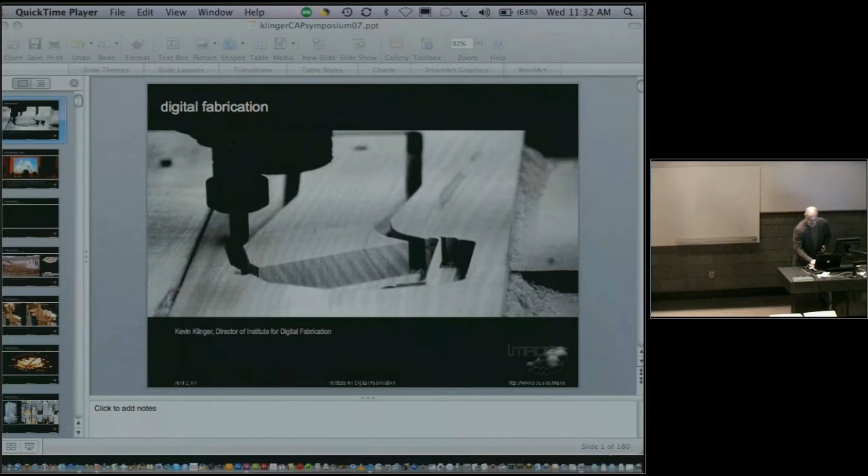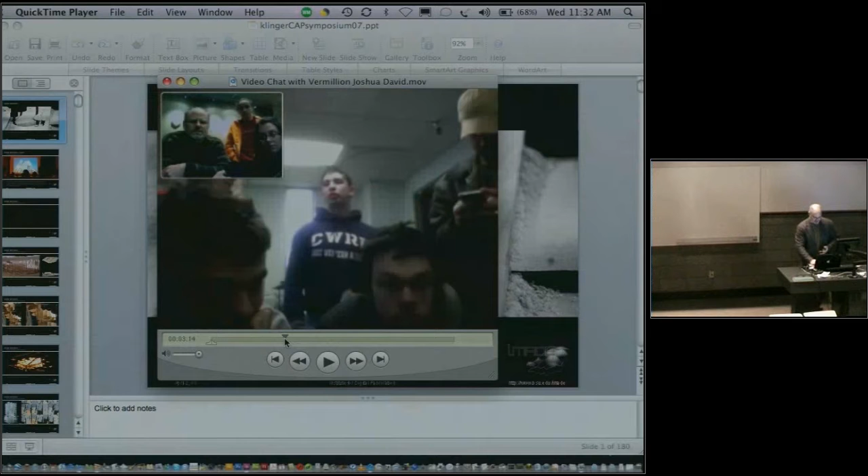Let me just move ahead a little bit. We're up in Eaton, Indiana right now, this is 10 miles north of here. We had our router that we purchased, that is actually going to be here for the use of people at CAP, installed up in Eaton, Indiana temporarily just so we could get operational and working with it. I'm going to show you a little bit of it.

Nice shirt you have there. Hey Rob, hey Rob. So that's the router. Actually, that's the mold.

It's crazy, this project is absolutely about this kind of multiple tasking. But I digress. The factory up in Eaton, the students have been working up there to actually put the thing together. They've been working with a company called Arrowhead Plastics, helping them with mold making, working with plastics fabrication for the exhibition as well.

There's a responsibility to serve what's going on in our region, to connect with industry and people making things here in Indiana. Digital fabrication, as you saw in the presentation with the SOM work earlier, is something a lot of people around the world are really doing. We're trying to frame that notion and make the case that Indiana already has a strong tradition for making things. By connecting to these global networks, we can help Indiana industry enter into that conversation and make things better working with these kinds of devices and techniques.

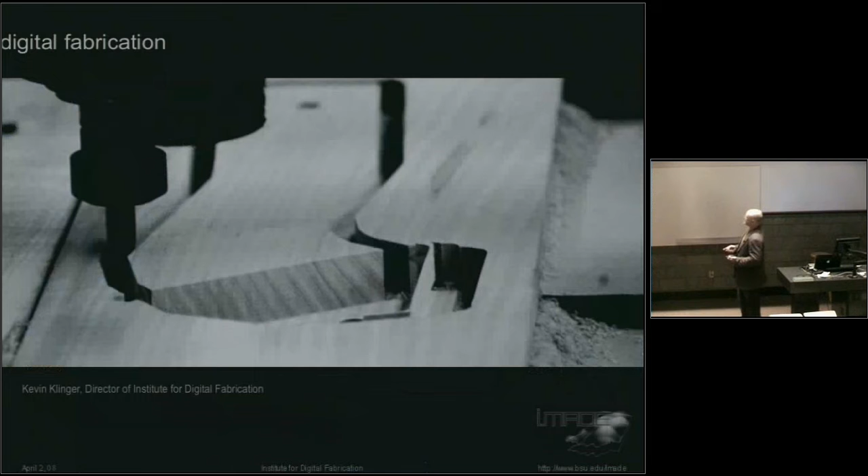To that end, we hosted a symposium at the Indianapolis Museum of Art called Manufacturing Material Effects, where we invited a team of international designers and thinkers from around the world, people from the offices of Rem Koolhaas, OMA, Shop Architects, Jeanne Gang. There were about 19 speakers gathered for the symposium. There's a book coming out - all the chapters have been edited over the past semester, and it will be out in June. The book is also called Manufacturing Material Effects.

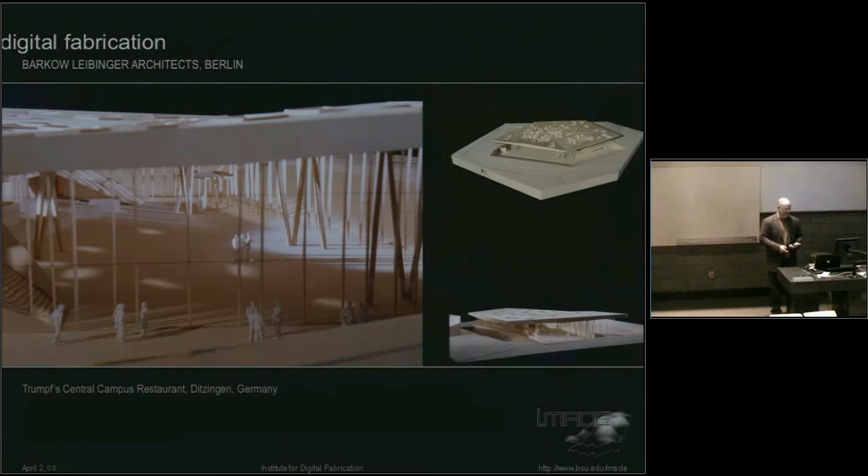I'm going to show you some of the work of the architects and fabricators present at that symposium. This is a firm called Barkow Leibinger in Berlin - they're looking for interns right now, by the way. The studio is working on this campus called Trumpf, a CNC machine tool company. They're digitally fabricating and customizing these daylight lighting systems for the cantina.

They've been working on office towers in Korea where they wanted to create a facade system - like in the 70s when everything got mirrored, the idea was a perfect mirrored facade, but it never quite worked because the mirrors were always slightly off, giving this kind of ripple. So they said, let's celebrate the ripple and make it consistently inconsistent.

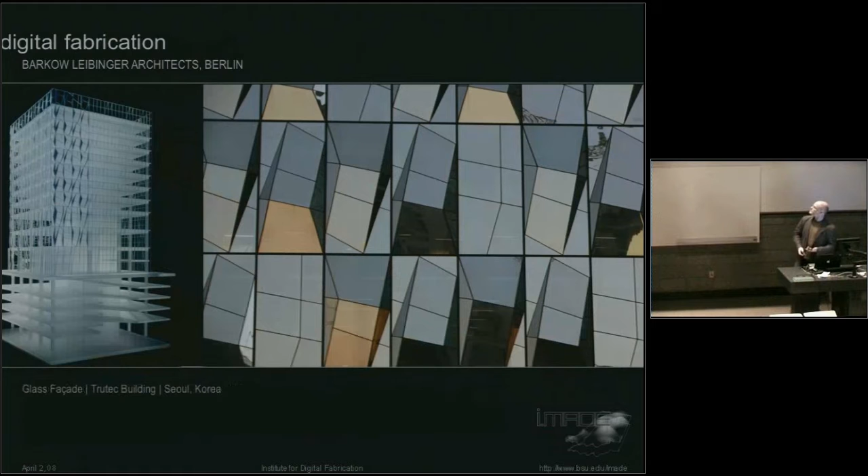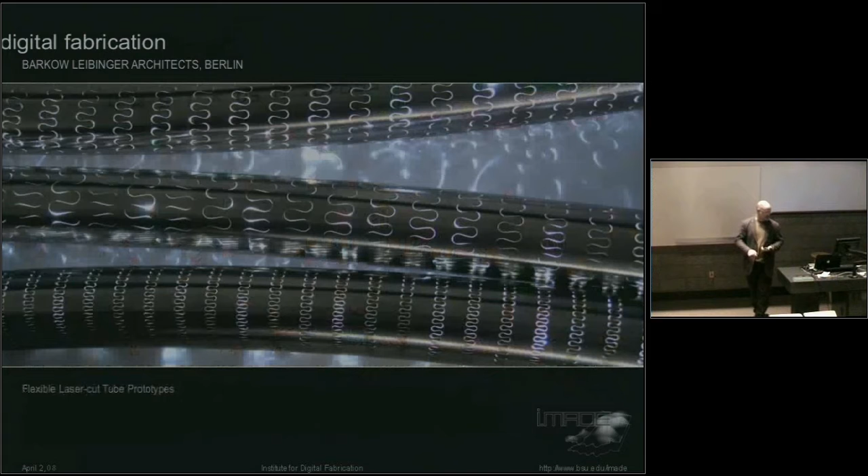This is the project under construction, and these are some studies in their courtyard in Berlin of this consistently inconsistent effect. They also have a machine tool that cuts tube steels, and they're developing lighting systems as well as an innovative facade system where these things can pivot on a point to control daylight based on where things are located inside the building. As the tubes spin, you can control the amount of daylight infiltration.

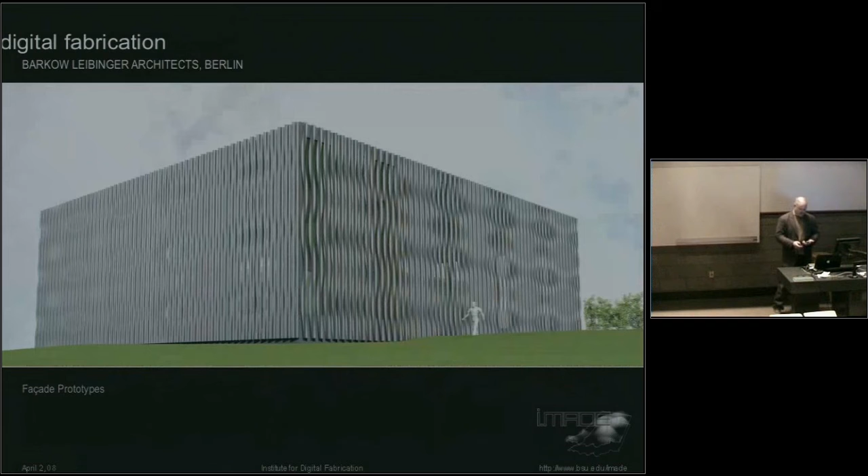They also have this great piece, the gatehouse to the Trumpf campus, where they wanted to achieve something like Prouvé's gas station, where everything was built as a fabricated piece. They wanted to play on that, but achieve an extreme cantilever. You know the rules of cantilever - you have to keep two-thirds of it back and cantilever maybe a third out beyond the boundary. But they wanted to push that limit, and the way they did it was by looking at what was happening in the factory at the machine tool company, where they fabricated framing systems for panels, then interrogating what that might mean for architecture.

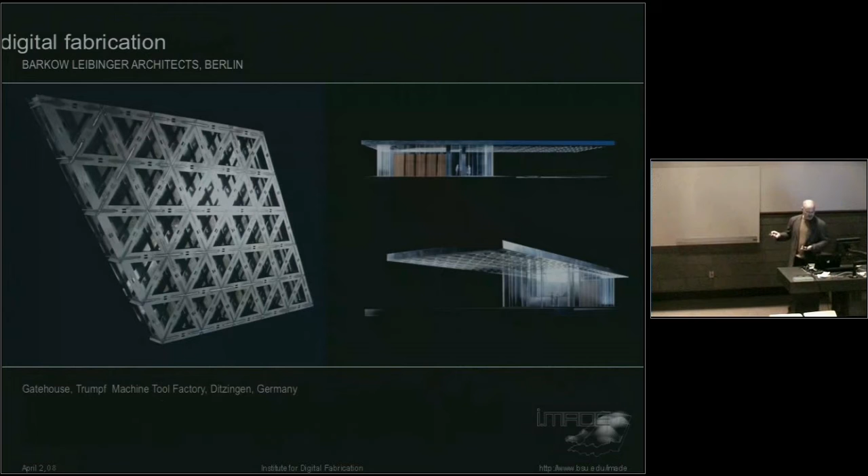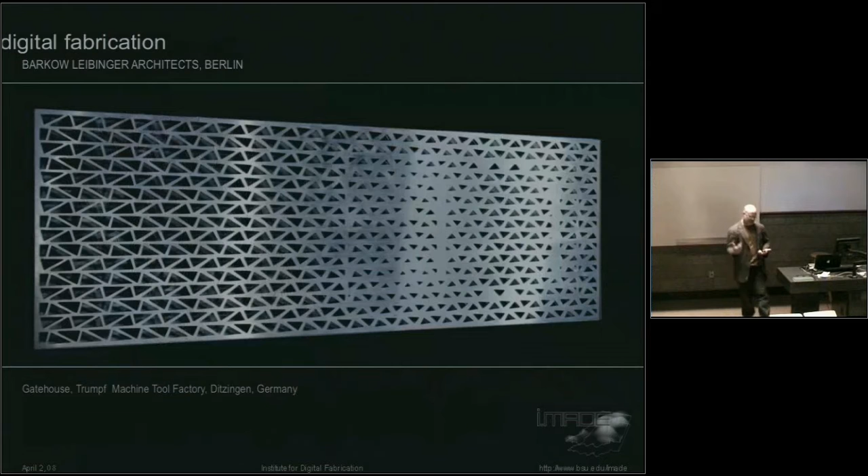They did stress analysis tests in conjunction with an engineer and developed a system where the form of the piece is informed by the way stress moves through it, so they can achieve much greater cantilevers. This brings the notion of study, simulation, and biological behavior directly into fabrication. You test it before you build it - you know exactly how it's going to perform, and you're able to achieve things you may not have achieved just by cutting it out of cardboard.

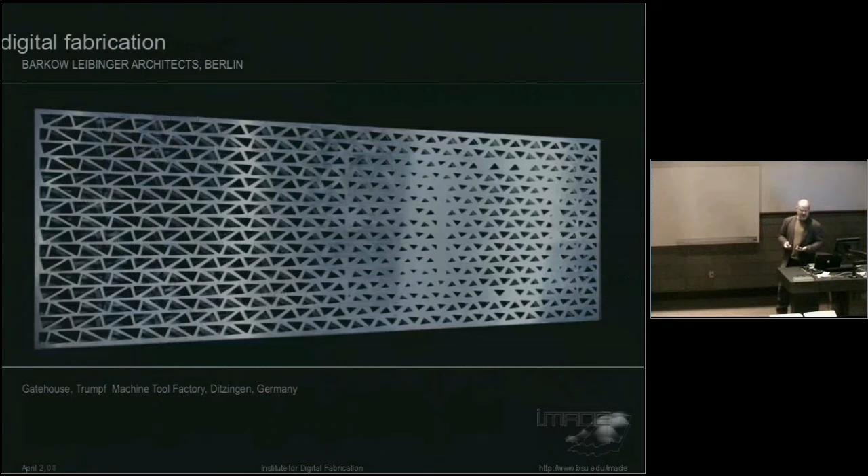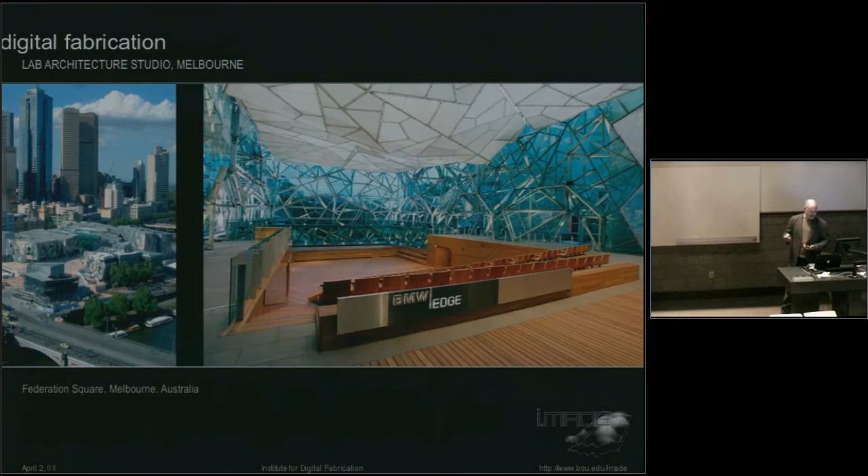So here are some other examples of firms that had work at the symposium - this one's a little more Baroque in nature. This is Federation Square in Melbourne, Australia, by Lab Architects. They were teaching at the AA, won this competition, then moved down and did Fed Square, and they've been in Australia ever since. They're doing a lot of work now in places like Dubai and elsewhere.

They wanted to study this kind of panelization and how they could achieve opacity, transparency, translucency, and openness in this kind of collage-type facade skinning system.

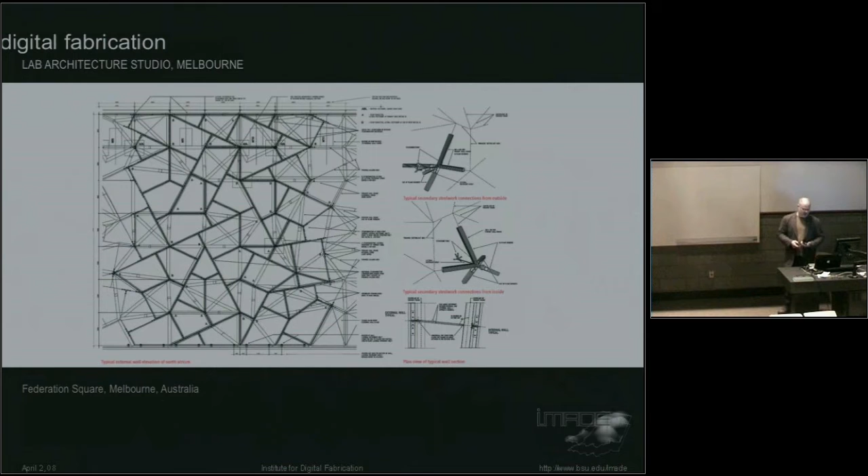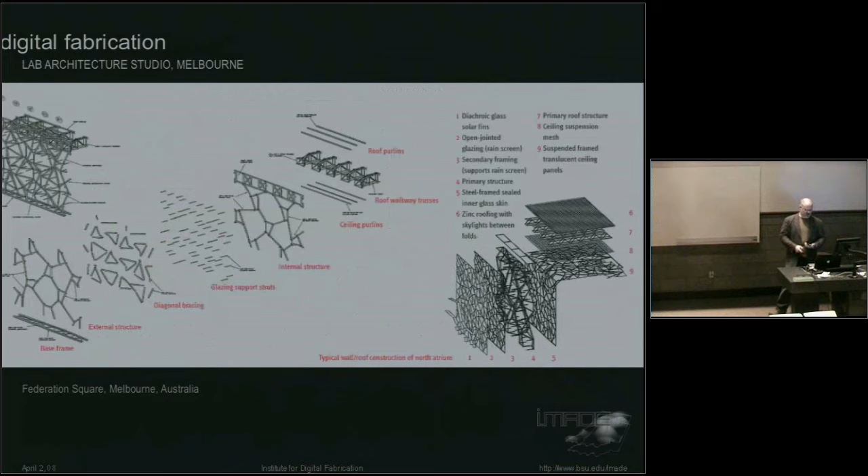These are the actual construction documents, taken directly from the model. The information is so complex that it takes algorithms to actually generate the form, but then they're able to take those algorithms and translate them directly into the model, which they can use to send directly to the fabricators and make every part, piece, and component. These are some of the actual documents used to get the thing built, coming directly from their model as well.

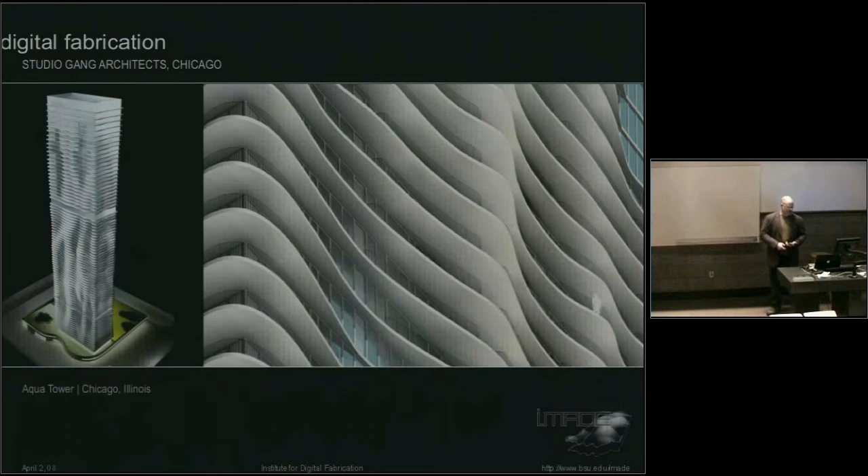Another one, a little more local, is Studio Gang up in Chicago. This one just started construction, called the Aqua Tower. Instead of thinking of a surface effect applied or wrapped around a building, they started to interrogate the floor slabs based on information about views, maximizing views along the lakefront. These are some renderings of the piece going up right now, and diagrams they used to develop and study the facade system.

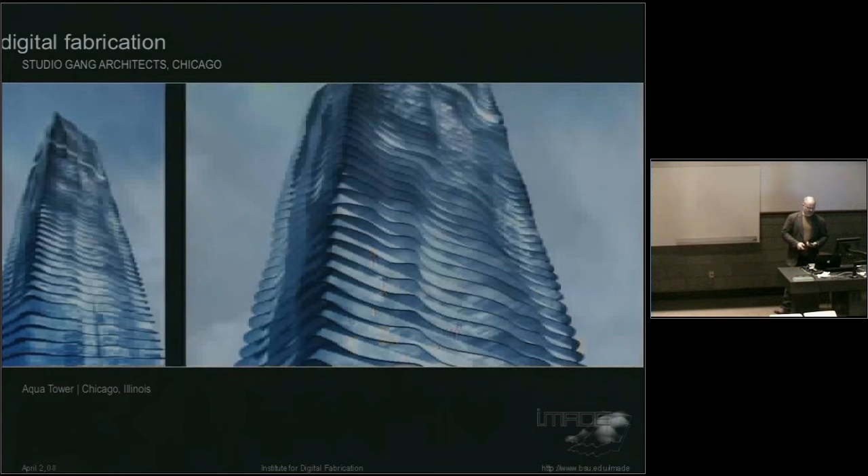I'm going to go through these quickly because I really want to get to the student work. If you want to see this stuff in more detail, please stop by the Indianapolis Museum of Art for the exhibition, because a lot of it is on display. There's a sensibility of materiality in a lot of these projects as well.

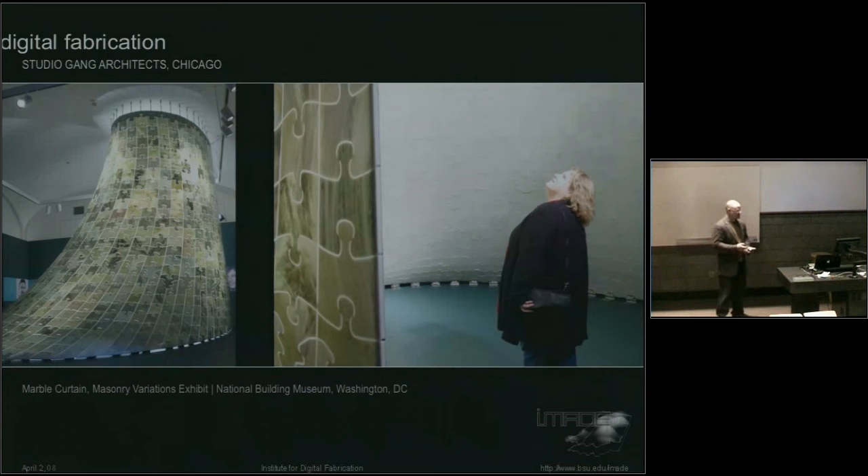Jeanne Gang also worked for the National Building Museum and developed this marble curtain, a kind of hanging curtain, where they worked with Thornton Tomasetti, structural engineers, to figure out a way to use stone in tension, since stone is always in compression. They wanted to see if they could innovate on stone, and developed a joint system, a kind of detailing where the whole thing is like a puzzle piece that translates loads all the way down to the ground, with the piece itself hanging from the ceiling. So it's actually stone acting as a curtain piece.

Some other projects they have going in Chicago. And then, of course, Architectural Association—you all know Jason Johnson. He went there and has a good knowledge of this kind of working methodology.

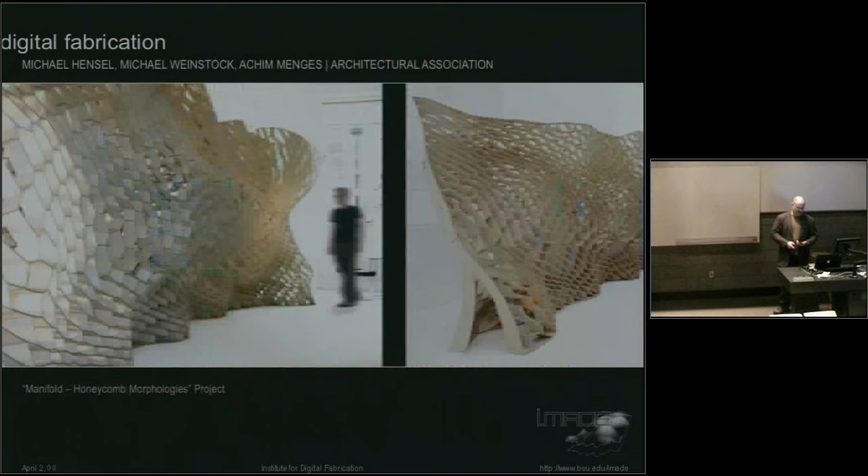What's happening right now is this kind of morphogenetic, evolutionary design, where they start with these details and, through parametric modeling, let it ripple through the entire system. You figure out a detail, and through variation and repetition they're able to create innovative pieces that are very much about how the thing goes together at the elemental level. These are some of the studies they've done along the way. There's a huge group of them publishing quite widely right now.

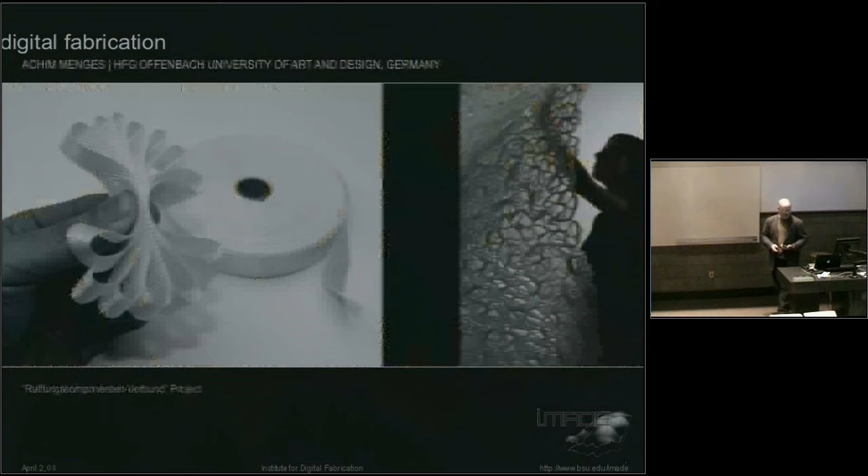Beyond those form pieces, the other aspect is people like SHoP Architects—we have an intern there right now working with these guys. They've gotten huge very quickly, and they're very interested in this notion of digital fabrication.

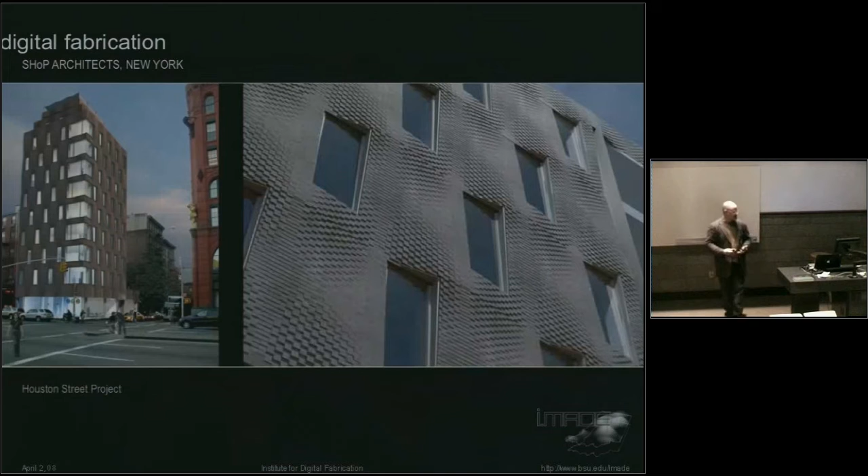For this Houston Street project in Manhattan, they developed a panelized system where they wanted to create variation along the facade. They discovered an old urban rule in Manhattan where you could vary the facade about 12 inches or so, related to ornament—how far you could stick a gargoyle out into the sidewalk before it started encroaching on the city. They used that to develop an innovative, unique facade system. The other rule was that they had to work in brick, since they were right next to the historic Puck Building in Manhattan.

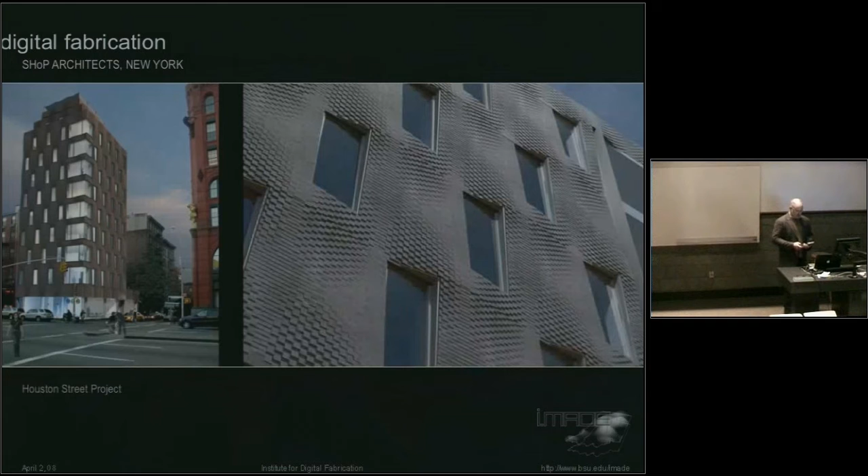It's Soho. So what they did was bring the precast panel manufacturer into the office before they even began designing and asked, what is it going to take? The manufacturer said most of the money in precast is in making the mold for the piece. So what they ended up doing was developing a liner inside the mold that gave them variation—using the same precast panel but varying the liner to create that kind of repetition and variation.

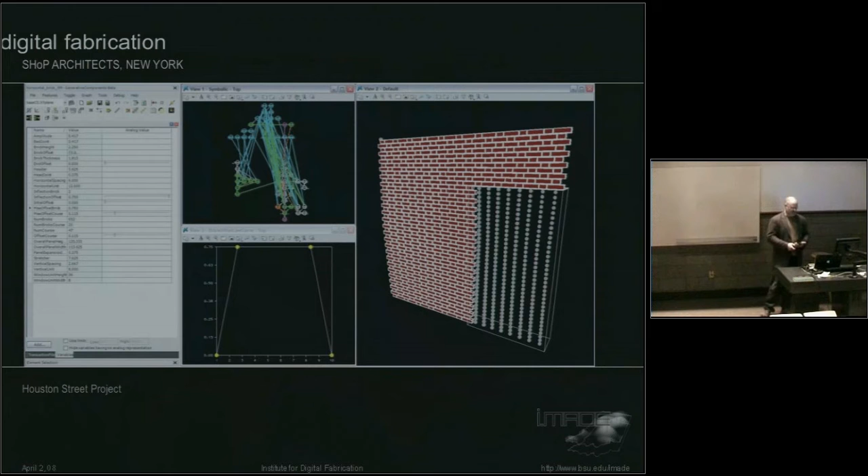It was nearly the same cost as just doing a standard, typical flat facade. This is the kind of innovation that comes from working directly with industry at the very beginning, during schematic design development. When you're trying to figure things out, you've got to have those kinds of partnerships. As we heard earlier, blurring of the boundaries is really critical to engage in the process in ways we haven't done in a long time, maybe since the separation of drawing and building.

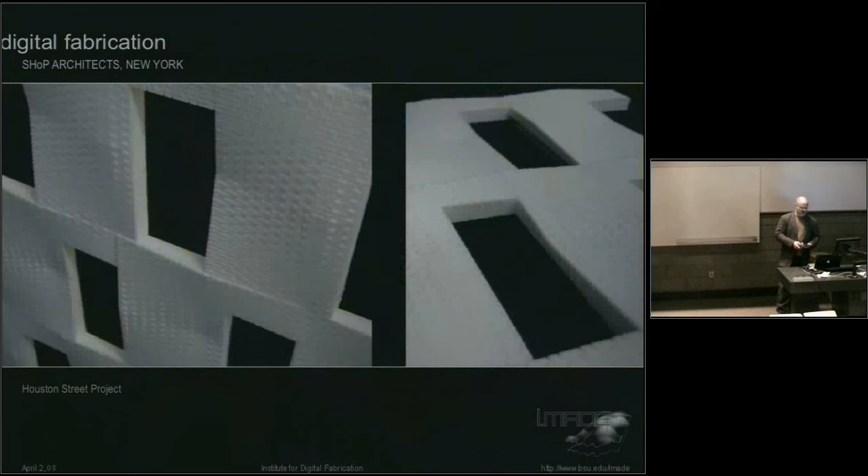So again, some of the studies here are the panel layouts for the project, the parametric model stuff that they were working with.

This gets to some of the interesting research about CNC technology as well. This is a group in Zurich at the ETH. They have a KUKA robot, which you can see is actually carving these panels based on algorithms, where each panel can be unique and uniquely carved.

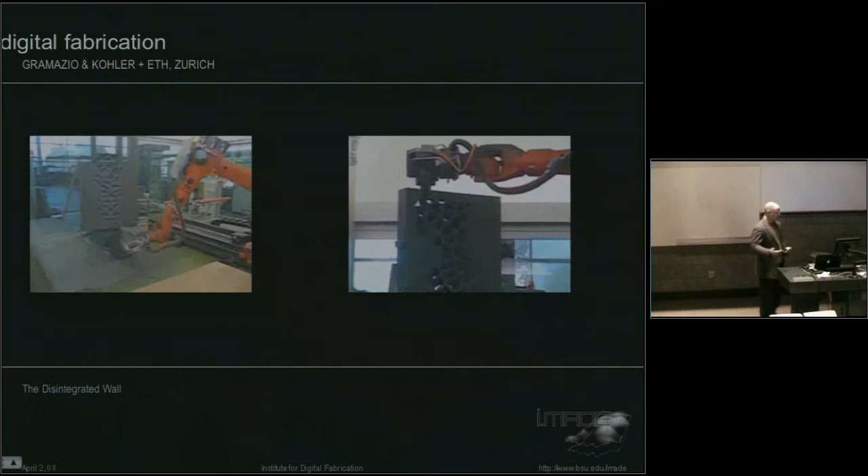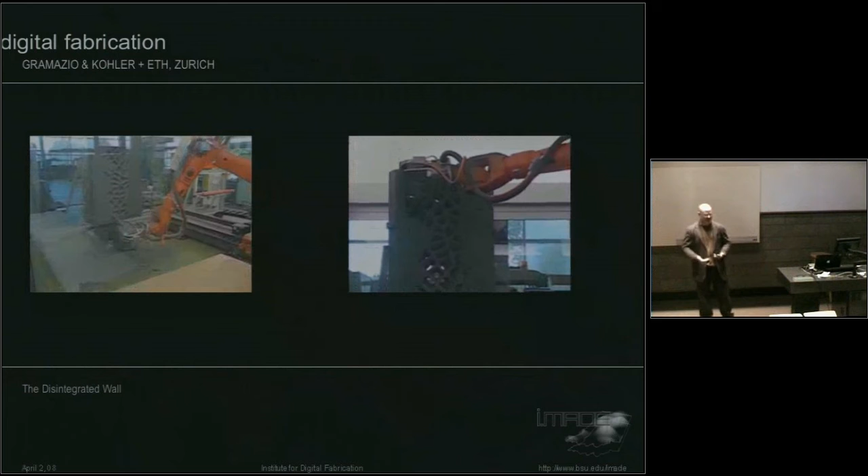The robot has basically replaced the craftsperson. The craftsperson is now not the person who's carving and cutting and doing that sort of thing, it's somebody who's writing the code. The craft is happening at the level of software, at the level of code, understanding how the whole thing is going together.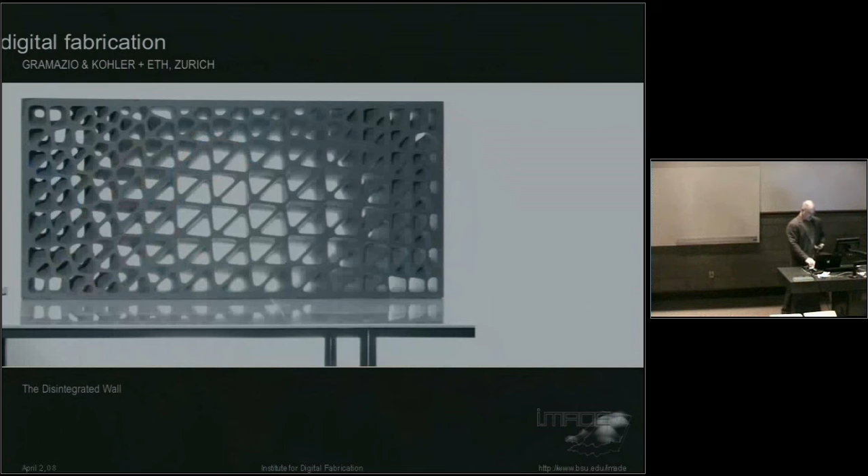Other interesting aspects: you're able to create these dynamic and phenomenal effects with these panels. So as you walk along the wall, this light effect follows you as you move along, depending on where your point of view is, making the facade a much more dynamic thing.

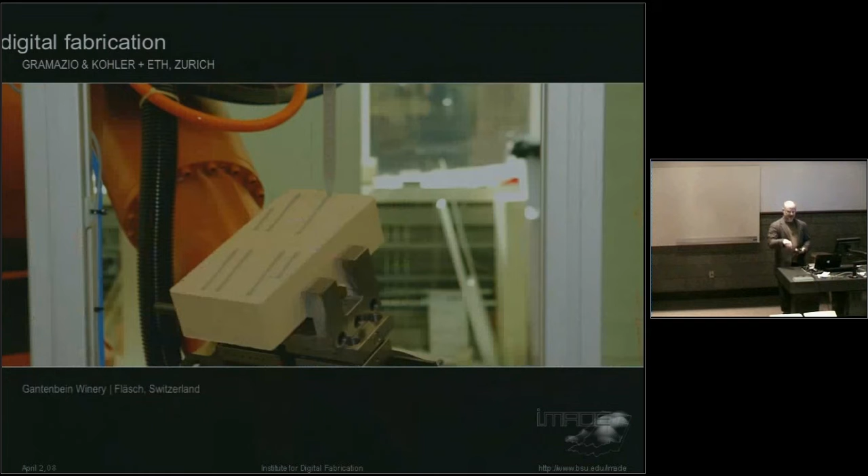They're also interrogating additive process, where they program the robot to build brick walls, which is really unbelievable and pretty amazing. They're able to achieve really interesting effects, even programming the robot to lay the glue to adhere the brick wall on the piece itself.

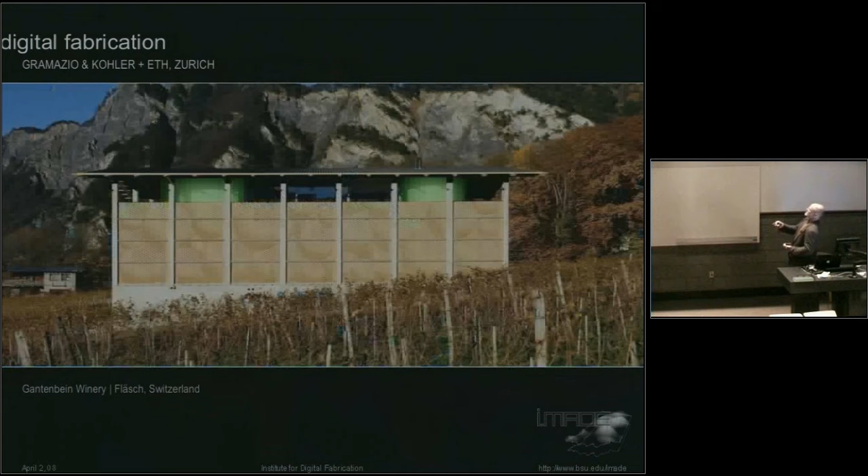So here's a panelized system. They've applied this to a winery in Fläsch, Switzerland, where they have this kind of basket of grapes inside the image, and then they're able to use the robot to fabricate these unique wall panels, creating amazing effects by dematerializing brick on the inside of that system. So these are some of the other studies of things they're doing at the ETH.

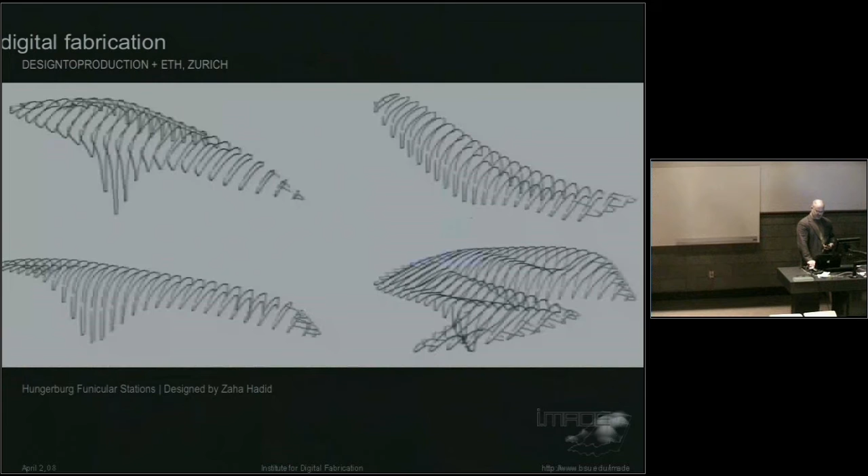We're also seeing other firms that situate themselves between people like Zaha Hadid and the fabricators, and I'm going to fly through this because I just saw my time card and I want to get to the student work, as well as Daniel Libeskind and some of the work he's been doing.

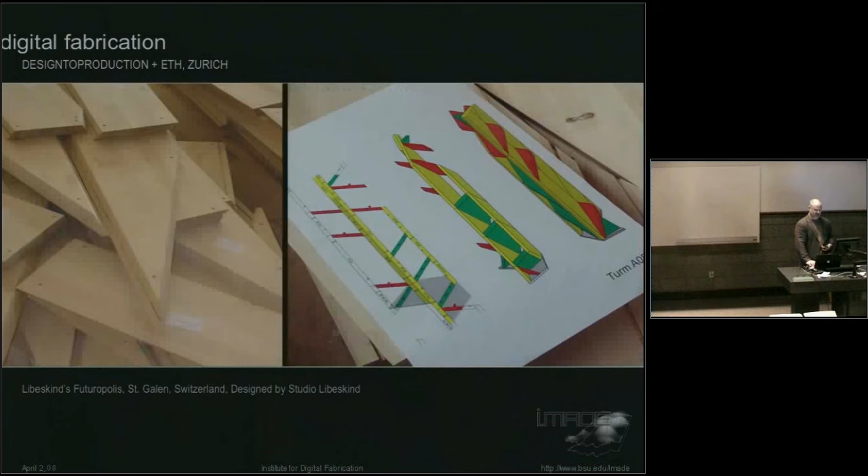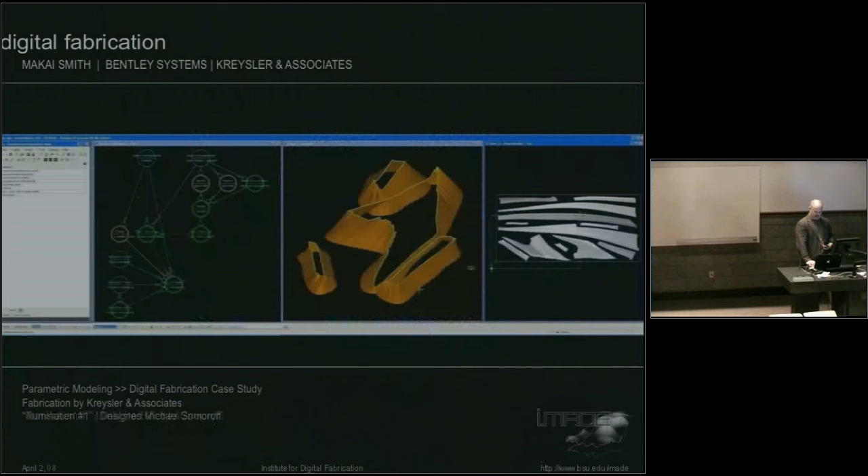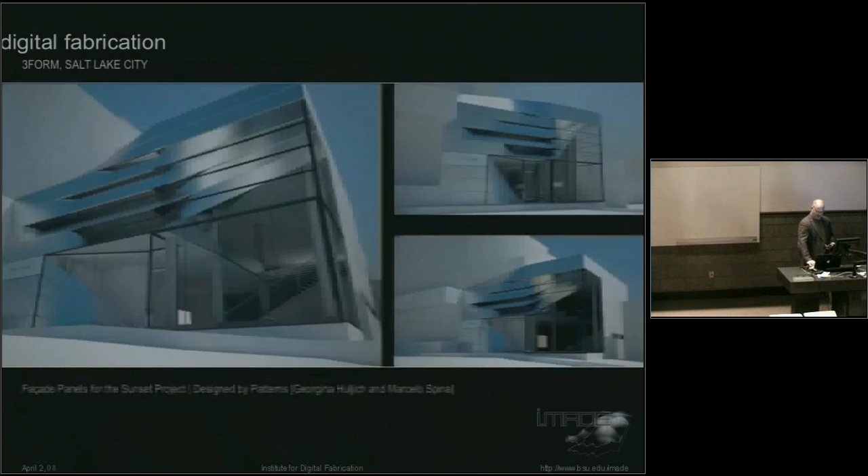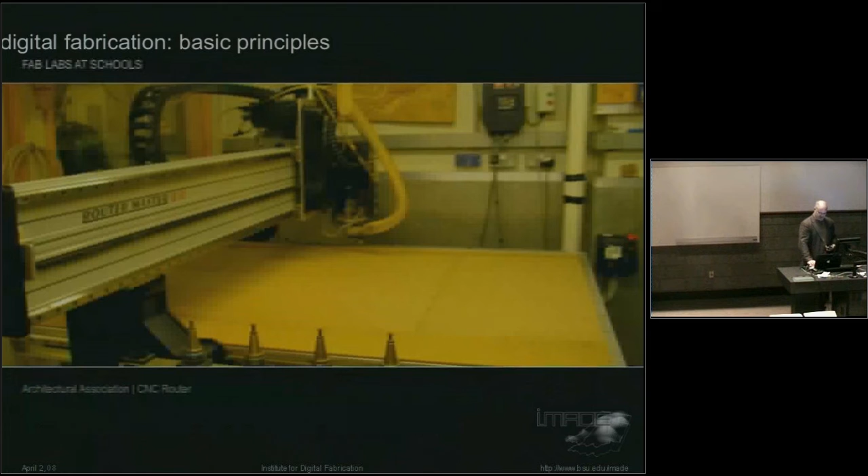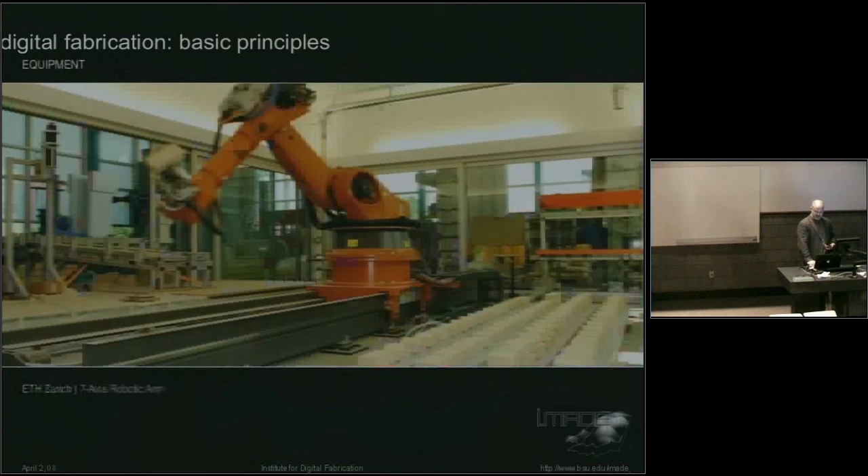Essentially, with digital fabrication, it's about the CNC technology, these kinds of laser cutter machines like we have here, and the CAM labs we see at places like Delft, as well as ETH Zurich and Ball State University. It's about figuring out tolerances and new ways of understanding the information, devices we use to cut things, to produce things, industry partnerships like we have with the limestone industry and the hardwood industry and others, as well as modeling information and scripting, which becomes very, very important.

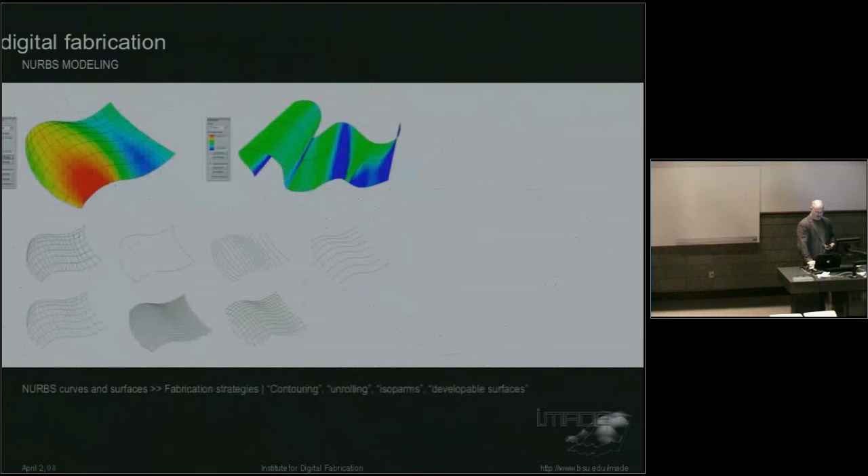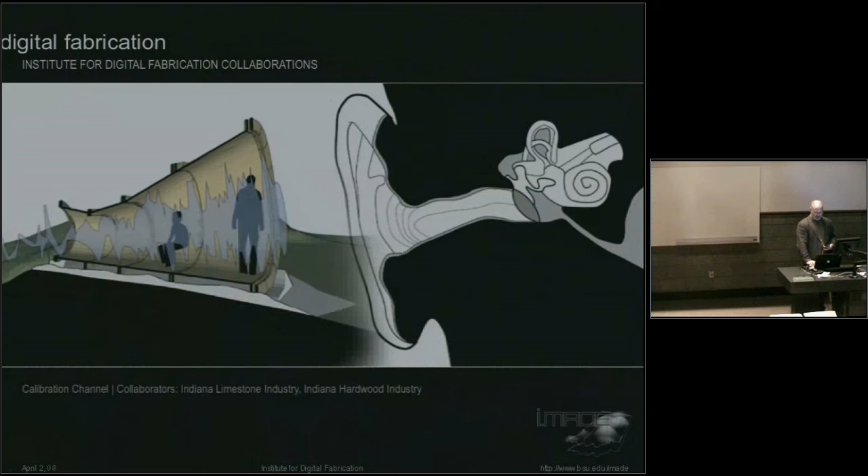Okay, so onward to what we've done recently with the Institute for Digital Fabrication. There's one project where we worked with the limestone and hardwood people and developed this bench called the calibration channel at Mounds State Park, where the actual sound of the river travels up the hill and the bench captures it and amplifies it, and it really works.

When you sit on the bench, you actually get this sweet spot, and you can hear the river much louder than you would if you were just sitting in the open space. This was a student-driven project.

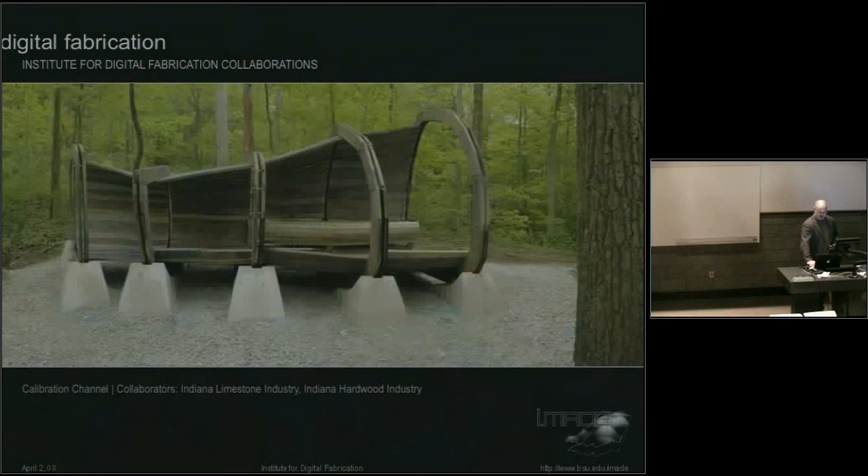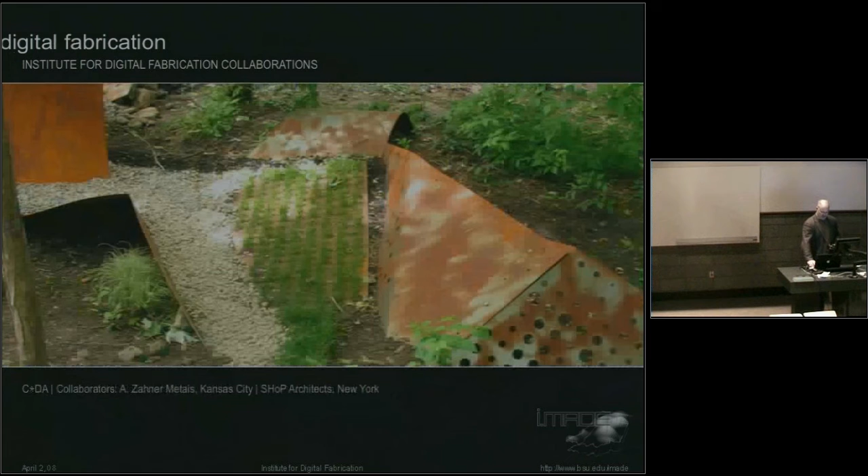Another project where we worked with SHoP Architects and Zahner Metals to develop this parametric boundary system, as well as an installation at the Indianapolis Museum of Art.

Finally, this is what I've been building up to. This is what we've been doing recently at the Indianapolis Museum of Art, collaborating with a team of fourth and fifth year architecture students to develop an exhibition piece on the router we've installed up at Eaton, as well as with industry partners in the plastics industry.

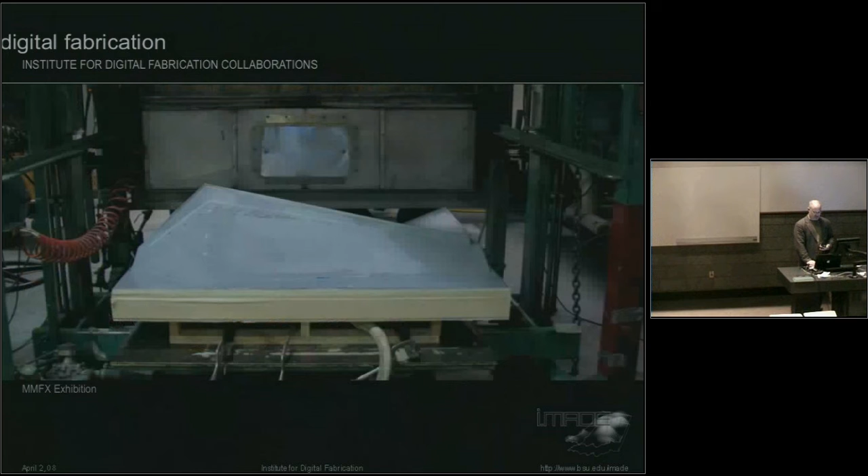This is the mold they're using to actually form the acrylic panels. This is where they were when they were having that video chat. These are some of the acrylic panels they've developed.

This is up in the Digital Fab Lab on the Series side of the building, where the students are doing studies about the light intention and the effects of the exhibition. These are very rudimentary kinds of studies of how they want the piece to be.

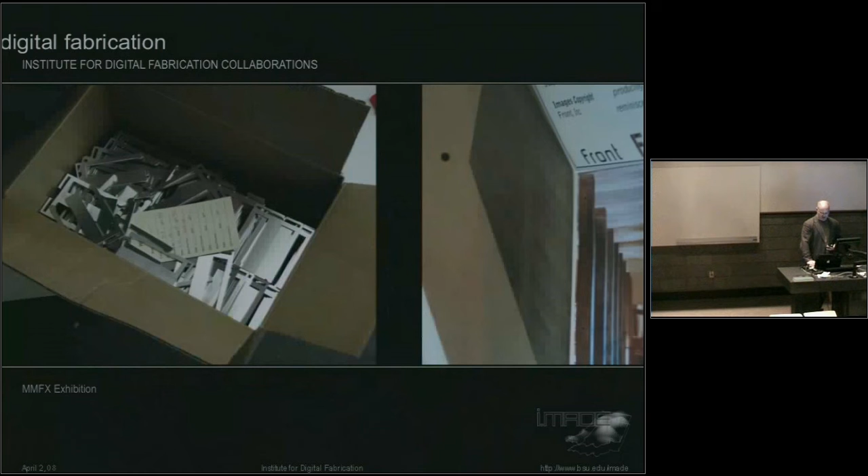They developed every single joint and detail and sent it out for fabrication with Midwest Metals, so nothing's been purchased - well, there's a couple things that have been purchased from Lowe's, but the idea is that everything is detailed and fabricated in-house. They've been working with the veneer industry, who just donated $3,000 worth of Indiana hardwood veneer to us.

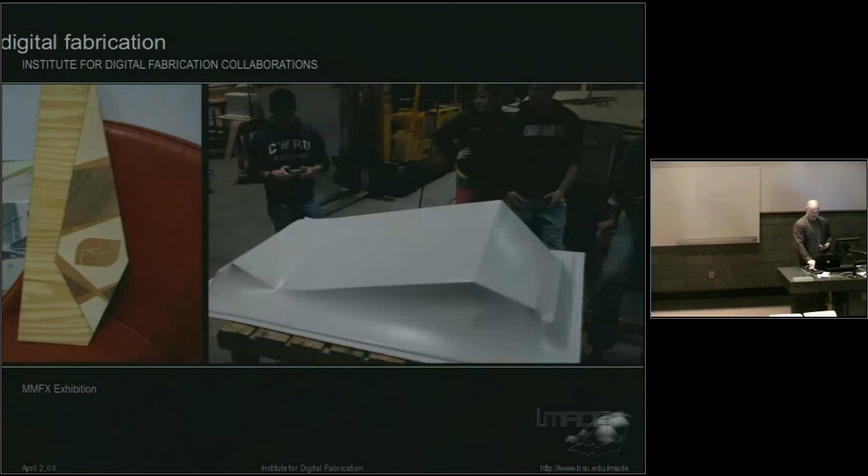They've been working with the plastics company up in Eaton, as well as Muncie, and the Indiana limestone industry as well, to develop a kind of foot system for the display.

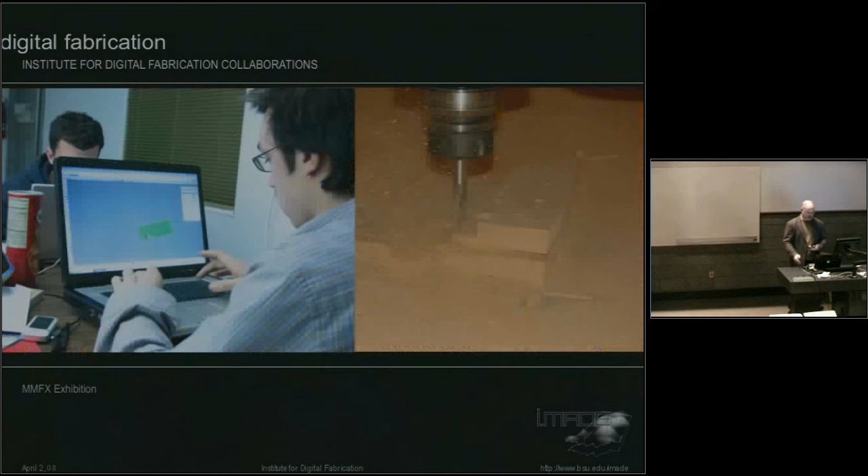Here is the student working up in the factory in Eaton, pulling the thing together, navigating the relationship between bits and atoms, making these things translatable. Here they are inside the space, working with the plastic, forming the piece.

There is our CNC operator extraordinaire, who has learned every aspect of how to operate the CNC equipment and knows the thing intimately. We're very grateful to Rob and his energy on that.

The students developed an encoding system so that there's a code on every single panel piece. They can read the board, and it tells them exactly where it goes in space.

And here it is, finally installing at the Indianapolis Museum of Art. This was last week. They also developed a joint system where the boards will slip together, and all of that was CNC manufactured by them.

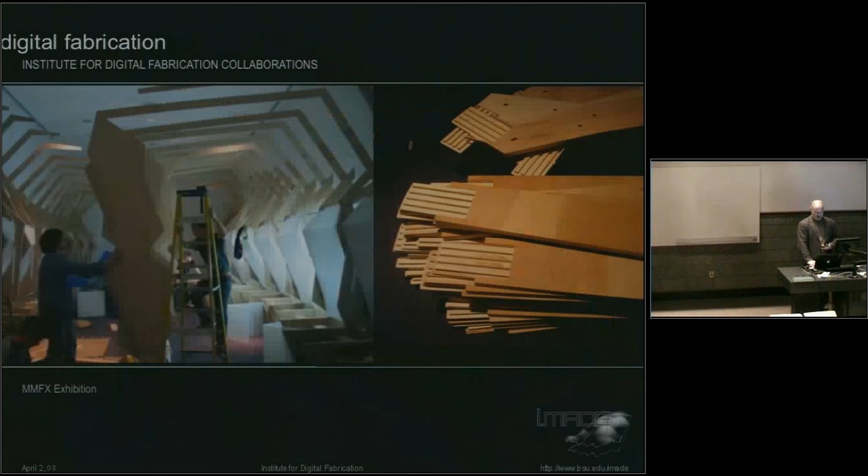Here they are spreading out the panels, and the boards are starting to go up. You can see the plastic acrylic pieces - there's a light that goes behind these. We have models from all of the people in the exhibition, as well as this kind of framing system.

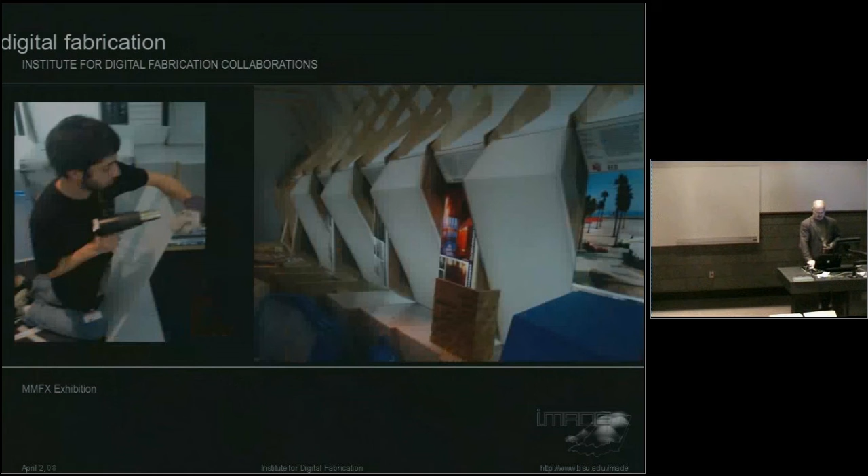They're melting the plastic to fit it into place, setting the piece up, and working a lot with their hands right now to get this thing done.

Of course, this is some of the content in the exhibition, like places like Arrowhead, who are working with us on the router, but they've developed a magazine rack for Karim Rashid in Manhattan and on Madison Avenue. But all of them were made here in Muncie, and so we want to showcase that in the exhibit and say Indiana is a place where things get made.

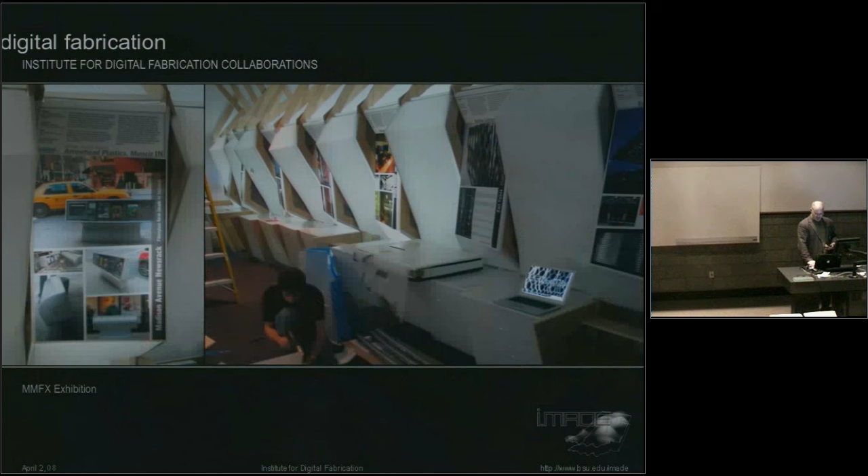And again, the Jeanne Gang's Tower is part of the exhibition as well. There's also a multimedia piece in the back that's part of the Institute for Digital Intermedia Arts.

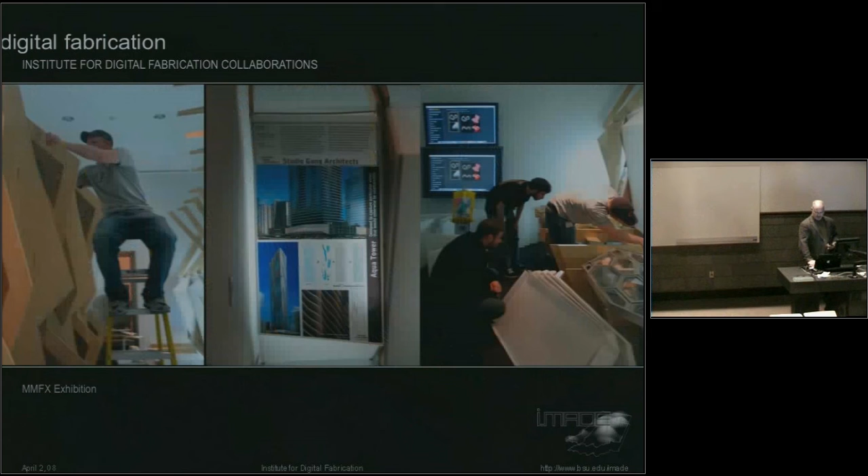The limestone folks gave us a gargoyle, which I think is actually quite fitting, because this piece, as people have been talking about the digital, is this kind of neo-Baroque - I don't believe that at all, by the way. It's not this kind of hyper-ornamentation. It's much more about how things get made now. And to me, that's almost a Gothic mentality, that you master the material, that you understand how things go together, and that sort of thing.

So I'm going to leave you with this image. This is the one I just got, as of 10 o'clock last night. The final piece is up, and the students are enjoying the content of the exhibit and taking a breath from all of their good work.

I think it's actually quite appropriate that we have this gargoyle standing as a sentry to the piece, and these things are like flying buttresses, as they are inverted flying buttresses inside of that space. So the buttress and the gargoyle have a nice kind of relationship with one another.